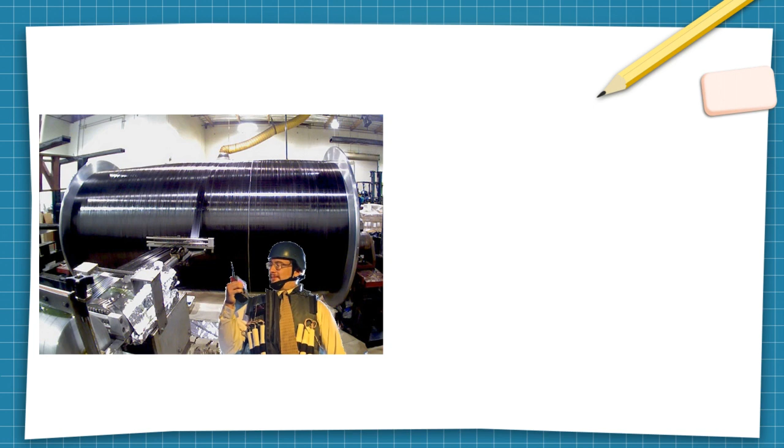Here we have their lead stress engineer, diploma engineer, Sam Hyde, looking at his calculator, being very pleased at the results, whatever they might be. And behind him you see the manufacturer of the pressure hull. And at this point, if you have some experience with carbon fiber structures, you have probably gone very quiet. There's a bit of a pregnant pause hanging there. I'll explain to the rest why exactly, but the fact that they put this on their webpage is kind of telling.

And yet this is the central section of the submersible. It's capped on both ends by a hemispherical titanium cupola. I don't think those are the reason why this thing probably imploded on the bottom of the sea. I think that this section that they made themselves is the part at fault.

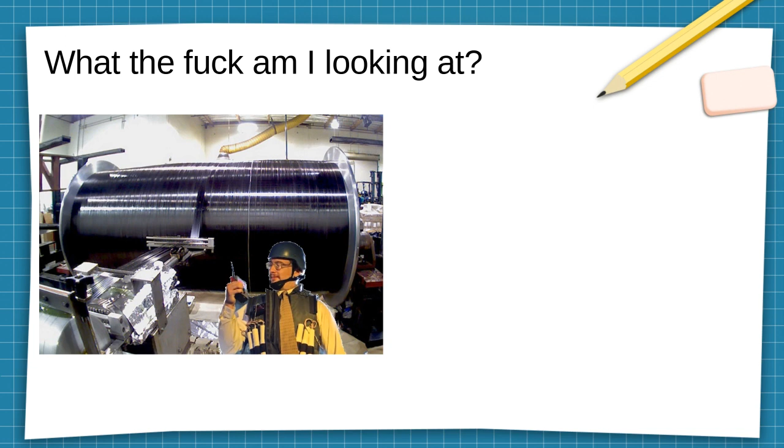I read some interviews. As you saw from the title, I haven't done a lot of research. This is just something I did quickly to bring to light something that I noticed. But from what I read, the CEO pretty much designed the thing himself. I don't know if he has any sort of expertise or education from the area of structural design, of systems design, of submarine design, or manufacturing, or anything even related to that field.

And apparently he doesn't want any old white guys working at his company, which is a bit difficult because most of the people who know how composite structures are made and designed are probably old white guys, especially in the United States.

But even honestly, it might be a majority just in the entire world, you know. Especially if you take the Japanese into consideration, as we know they are honorary white people too, so they kind of tilt the scales a bit.

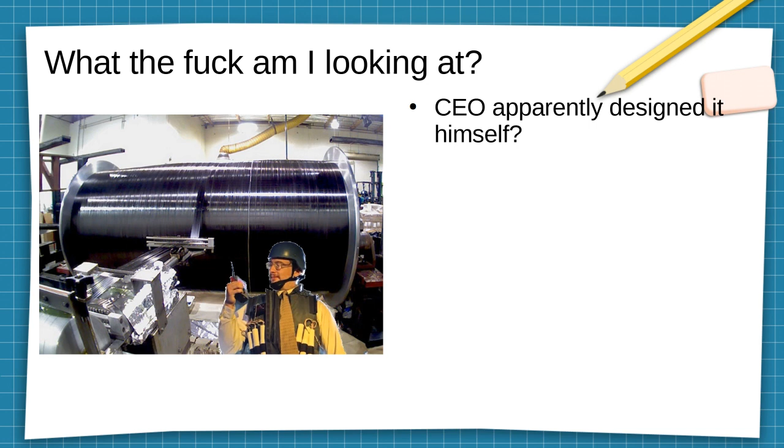So, to give you a little bit of background theory, I'm not going to go into any sort of detail here, but we have something called classical laminate plate theory, and that is a very basic, very simple theory that we use to make the first pass calculations for composite structures. It basically means you take all the different materials that are in different orientations and you just average them out. And then you treat it as a single element, whether it's a two-dimensional shell element or a three-dimensional volume element.

And the main thing here is that in the classical theory, effectively what's carrying all the load is the fiber, and the fiber only in the lengthwise direction. So this seat belt that they're winding around a drum is tape of pre-preg carbon fiber impregnated with epoxy, and they just lay it there and then let it harden, either just on its own or in an oven.

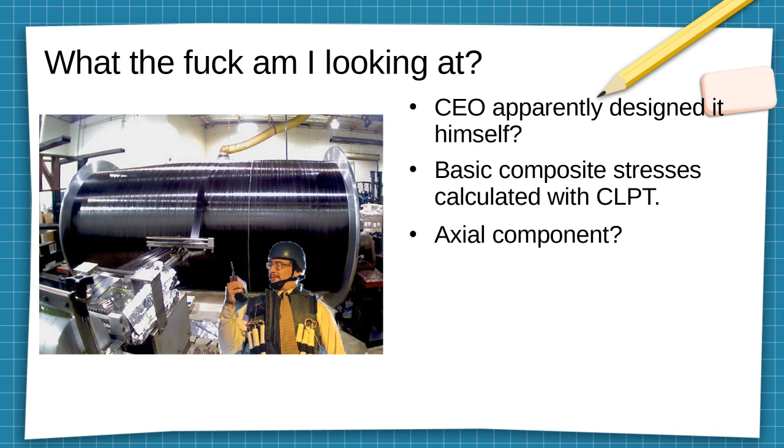If there's hemispherical sections at both ends, you can hook it around and bring it at a very severe angle, and you can get some lengthwise components there, so you don't have to hand lay any fibers in the axial direction of the cylinder. You can just hook it around and do it as part of this winding process, and that is why when you look at rocket motors, it has this rhombus pattern to it, because it goes left and right, with very large left and right axial components in the plies, and layers of composite are called plies.

I put this picture here, sorry to the people in the source who had to be part of this nightmare, but basically when you cut a composite in half, that is what you see. The white stuff is the matrix. The matrix is the engineer name for the glue, and the black spots are the fibers. And here you can see obviously why this is a problem, that there is no axial component in the winding: you just have spots of fiber, and there's no path.

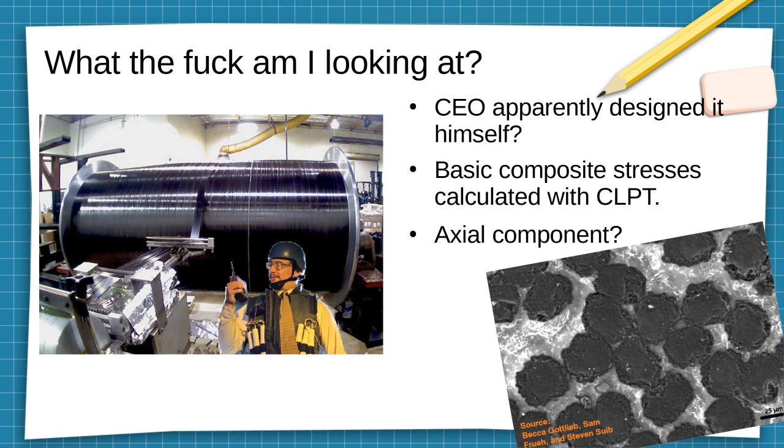In compression, yeah, those fibers are scrunched together, but in the conservative practice of engineers, you don't really take the strength of the fibers in the transverse direction into account at all. If the fiber is sideways, it doesn't matter. The epoxy matrix is really the only thing you consider at this point. Roughly speaking, it's not quite that simple, but just looking at this, it's shocking. It's a small miracle that it even went to that depth once, let alone something like 10 times before it imploded.

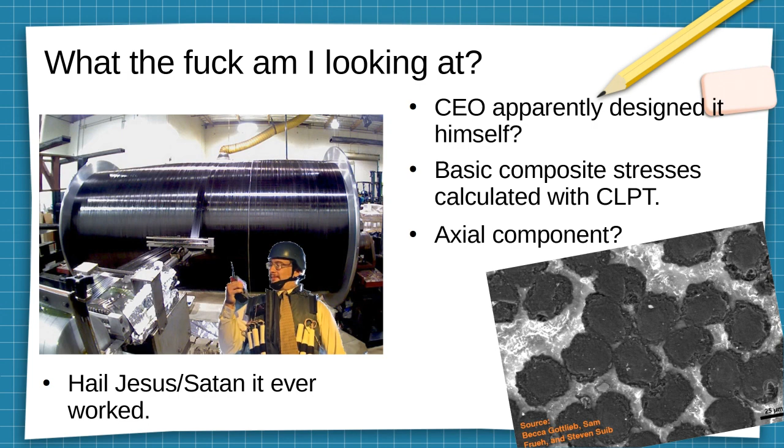I'm gonna get just a little tiny bit into the maths. Nothing of any sophistication, just something I could do in an hour on an old calculation that I could plug new numbers into. Assuming classical theory and a thin wall scenario, neither of which are appropriate for a complex situation like this. It's loaded both in hoop stress, that's the tangential stress component that goes around the pipe, and then there's the axial component that's in the axis of the pipe. And then this is not thin wall.

Obviously it has 5-inch thick walls. The thickness of the wall is like 1/10 of the interior diameter, and those are just assumptions from pictures that I took. I don't have the accurate numbers for the diameter and the length. The wreck of the Titanic is at a depth of 3.8 kilometers, so that's what I used. But yeah, these are not appropriate.

This is just a very quick proof of concept, back of a cigarette pack kind of calculation to give me an indication of what's going on here. And my first impression was pretty much spot on, like the failure criterions. Composites are very complex creatures.

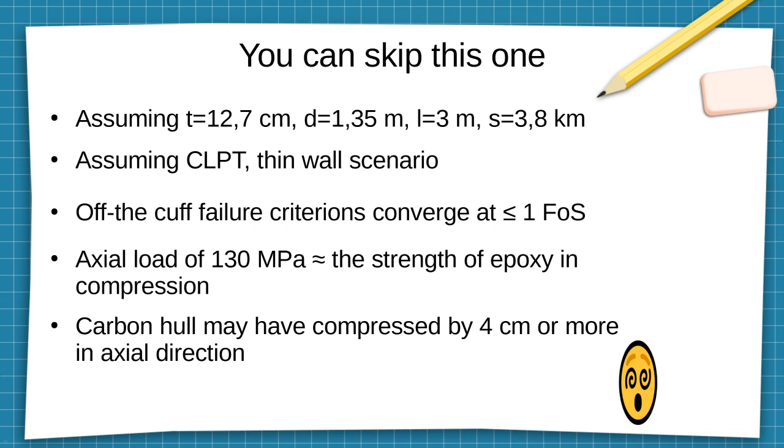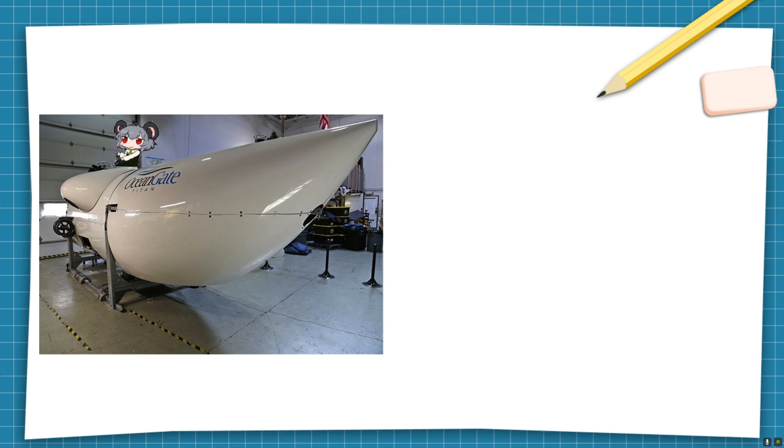I think the center section of the pressure hull failed in compression. I think the actual point of failure, if they ever find the submarine, is probably near the end caps, because that's what always happens. The failure is somewhere near a feature, because there's always some sort of stress concentration point there, and even if it's minute, it's still enough to begin some sort of failure.

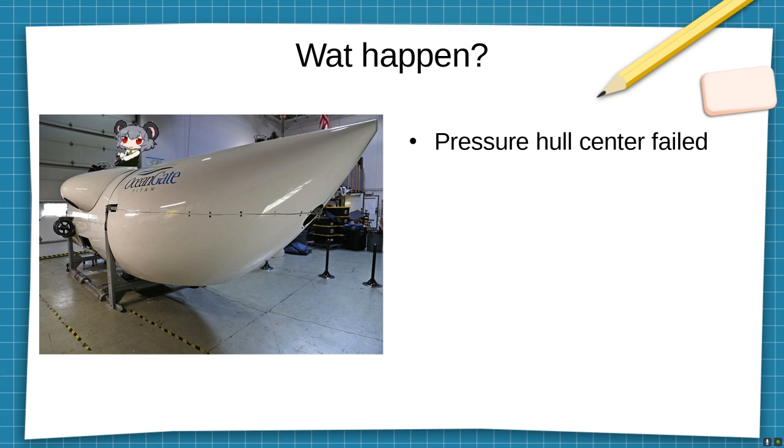And once you're at 4,000 meters, any leak of water is gonna be like a water jet cutting you in half. And even if you aren't cut in half, the failure of the pressure hull is probably quite rapid. So the onrushing water is just going to crush you, and even then, you're on the bottom of the ocean, you're just going to drown if nothing else.

I think that since they dove to the Titanic wreck, someone is probably eventually gonna find the thing, but I don't think they're gonna make it in time to reach their 96-hour oxygen limit, or whatever it was.